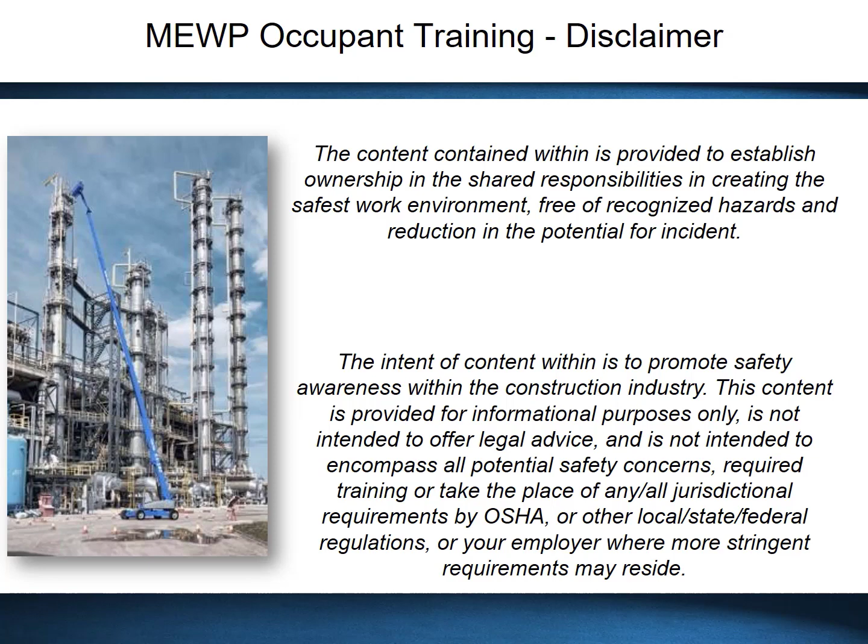Mobile elevating work platforms are governed by the A92 standard, and they are changing. There are a lot of aspects of the standard that are changing, so I've condensed this presentation down to the most important things that you need to know.

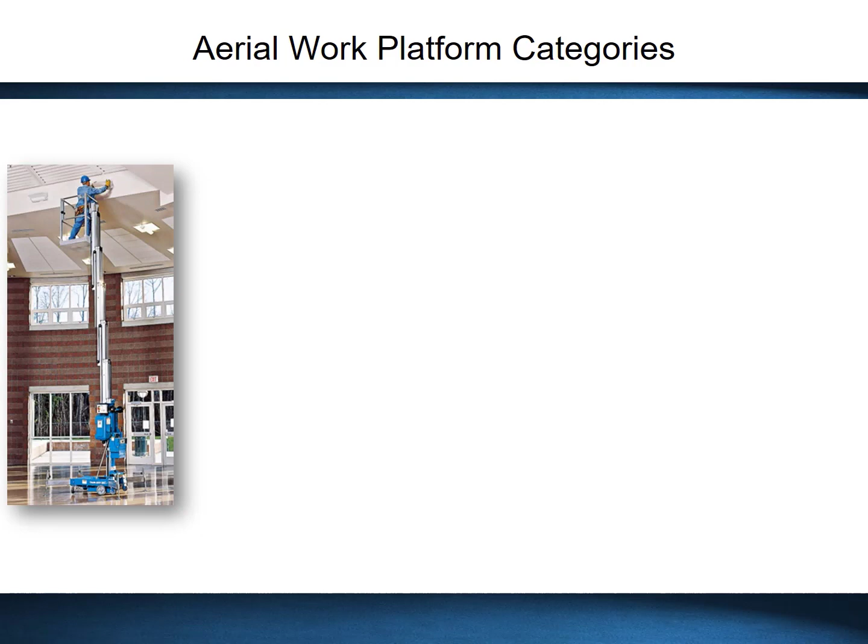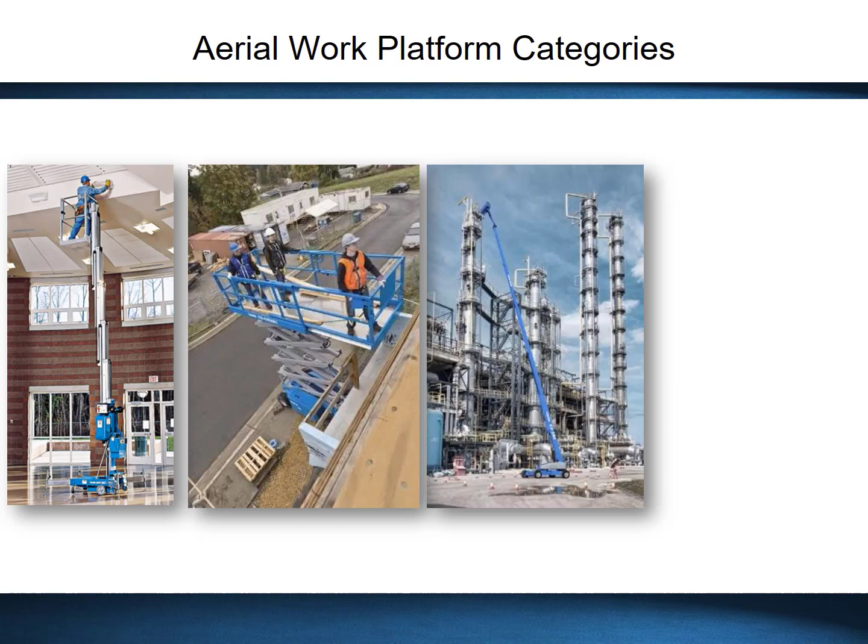Aerial work platforms previously fell into four categories: manually propelled vertical elevating work platforms, self-propelled vertical elevating work platforms such as scissor lifts and single personnel lifts, self-propelled boom-supported elevating work platforms such as articulated and telescopic booms, and vehicle-mounted elevating work platforms such as trailer-mounted booms.

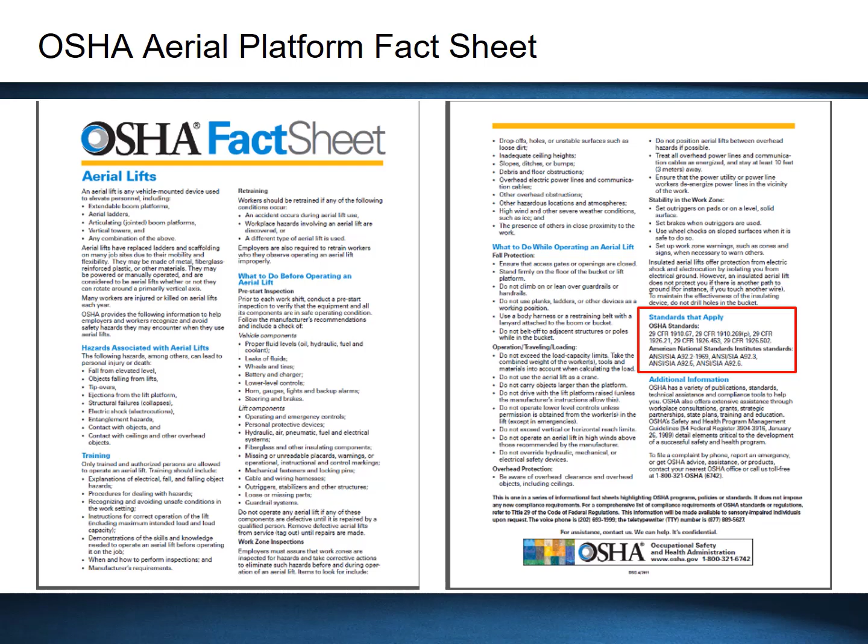If you take a look at the aerial platform fact sheet provided on the OSHA website, you can see that it actually references the standards that apply. In addition to A92.2, they also list A92.3, A92.5, and A92.6. So when the new ANSI A92.22 and A92.24 standards are released, it follows that OSHA will enforce those as well.

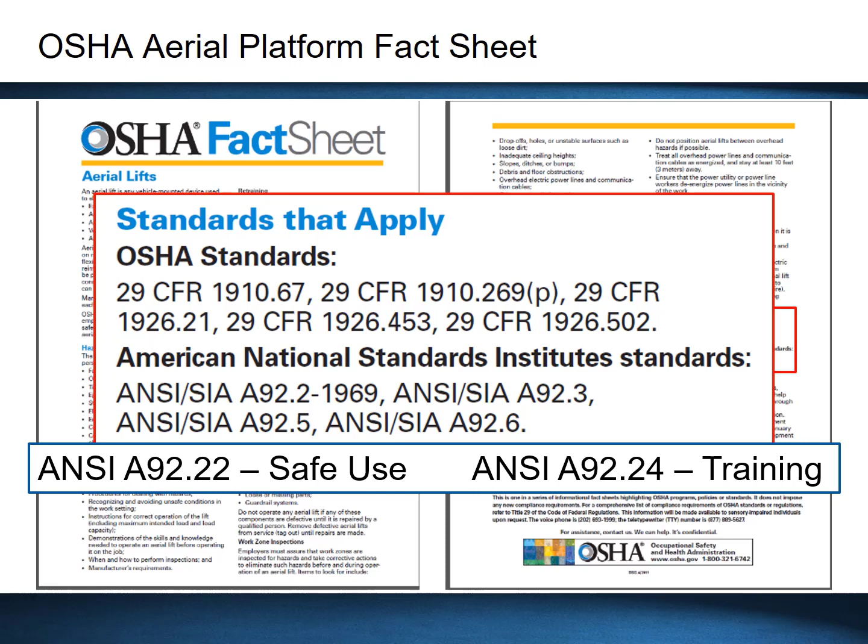Along with the term Mobile Elevating Work Platform comes a new acronym. Instead of AWP, we will be calling aerial equipment MEWPs.

Also, instead of the previous four categories of AWP that I mentioned at the beginning of this presentation, we will be using a new set of classifications. MEWP classifications are made up of a combination of two distinguishing descriptions: a MEWP group and associated MEWP type.

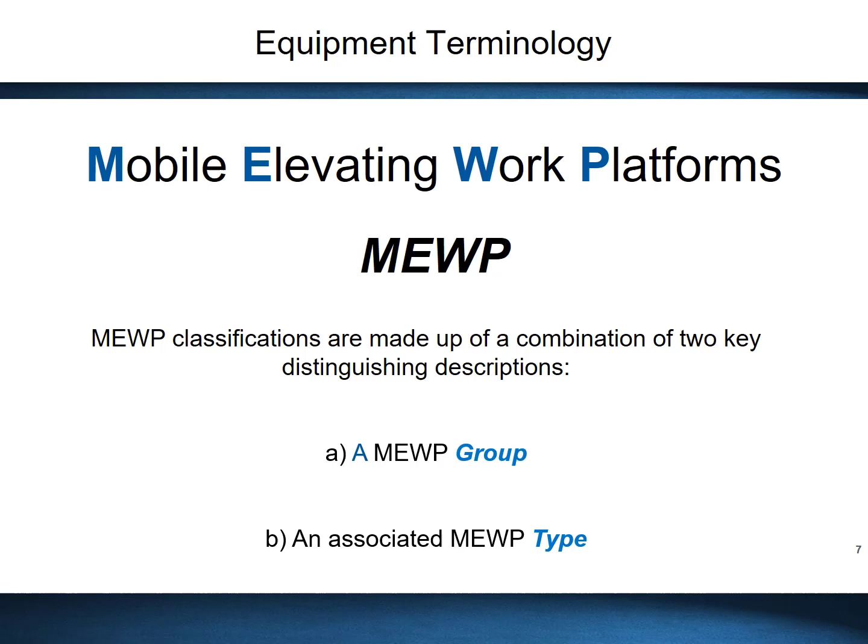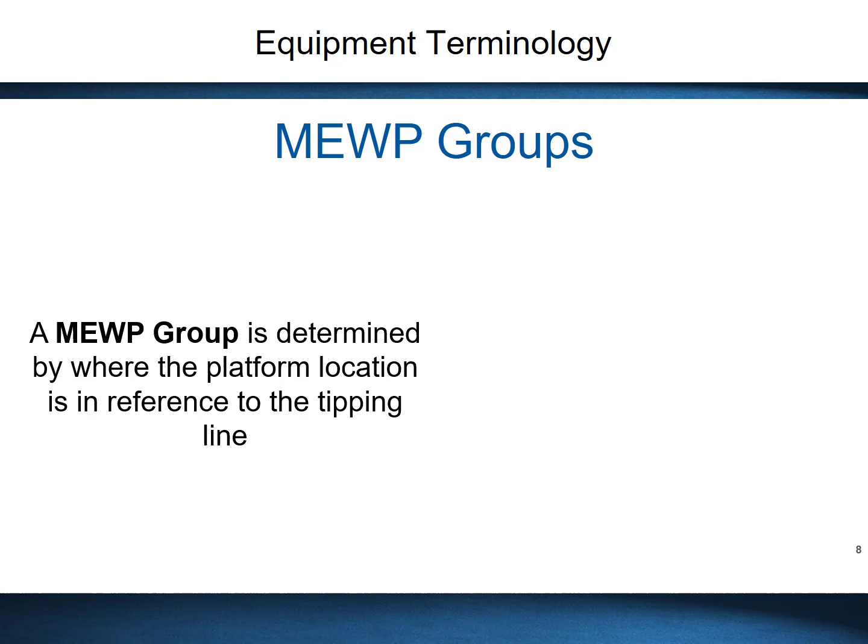A MEWP group is determined by where the platform location is in reference to the tipping line, which is either at the wheels or at the outriggers. A Group A machine has a design that does not allow the main platform to extend beyond the tipping line. In other words, the platform does not go outside of the drive chassis envelope. A perfect example of a Group A would be a scissor lift.

Conversely, a Group B machine has a design that allows the platform to extend beyond the tipping line. A great example of a Group B machine would be an articulating or telescoping boom.

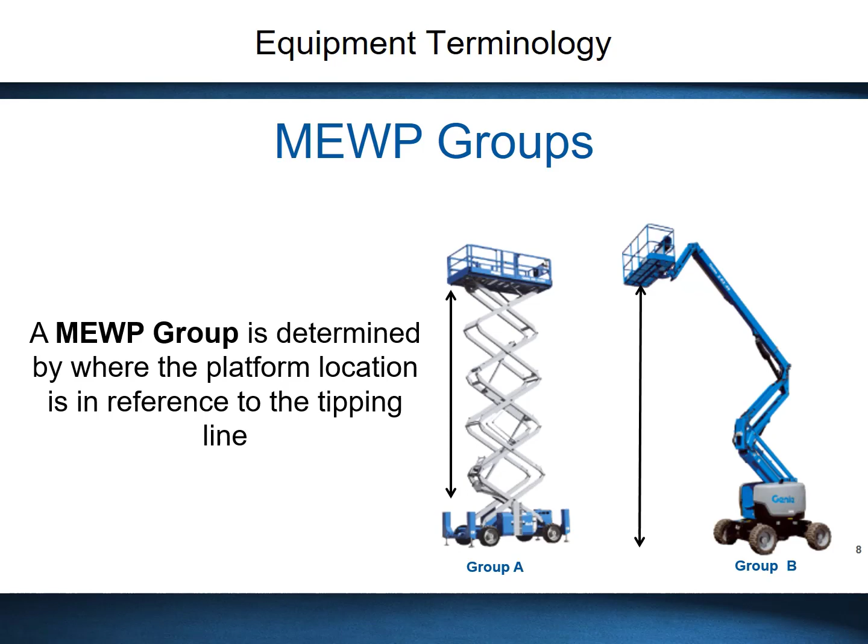In addition to a MEWP group, we have a MEWP type. A MEWP type is in reference to traveling. There are three MEWP types.

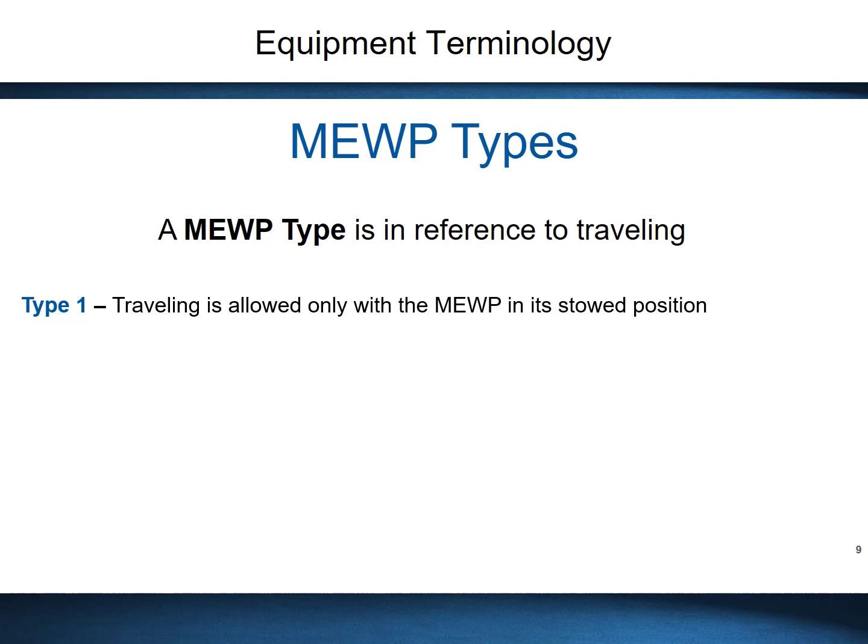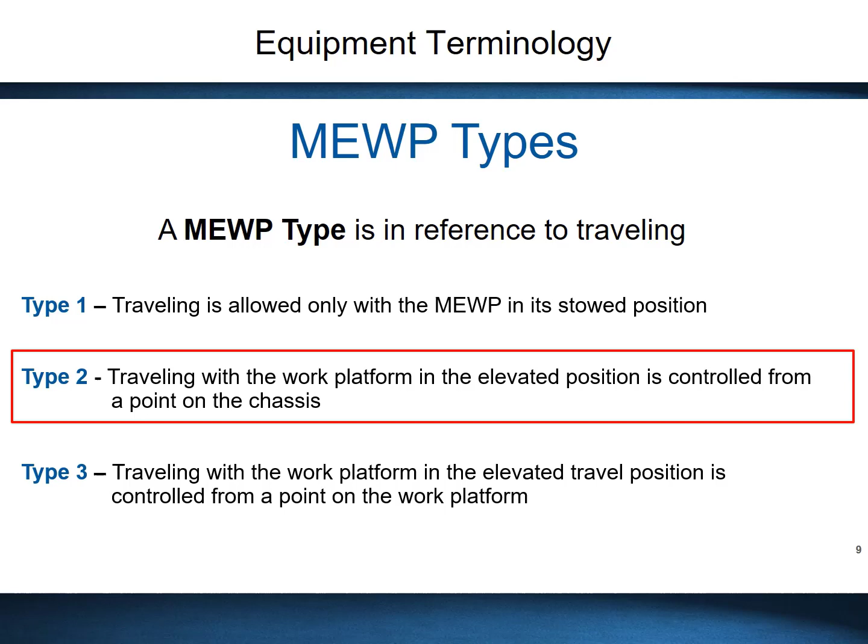Type 1: traveling with a Type 1 MEWP is allowed only when the machine is in a stowed position. I will give you some examples of these in a moment. Type 2: traveling with a Type 2 MEWP with the work platform in the elevated position is controlled from a point on the chassis. Type 3: traveling with a Type 3 MEWP with the work platform in the elevated position is controlled from a point on the work platform.

Type 2 MEWPs are not as common as the others. For the purpose of this training program, we will focus on Type 1 and Type 3 machines only.

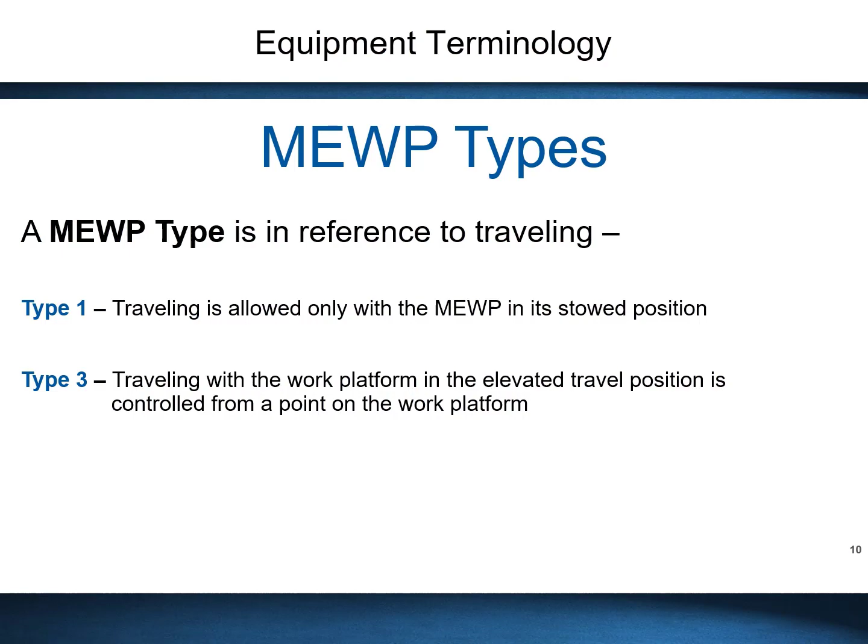Genie has supplied several different guidelines for the different types of MEWPs available to help you in the proper selection of the equipment for your project.

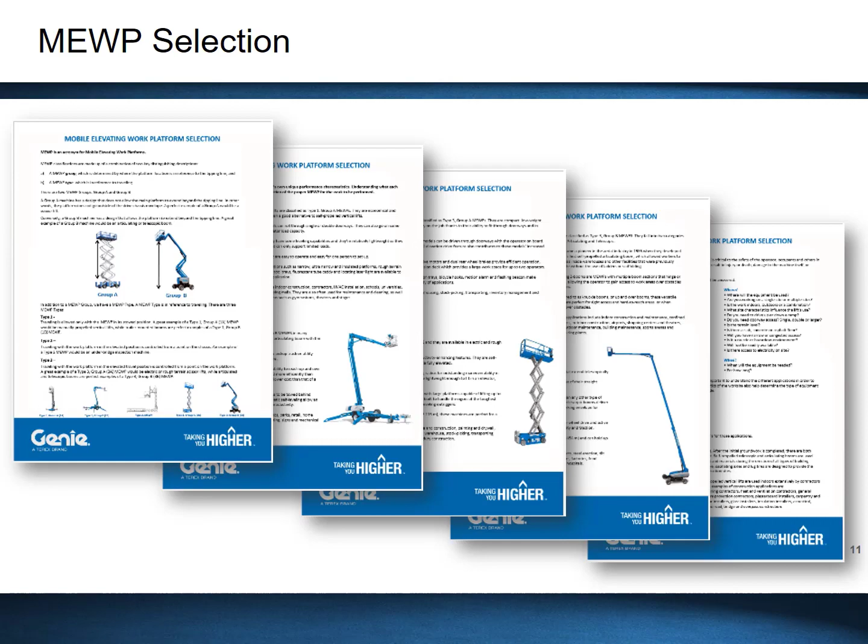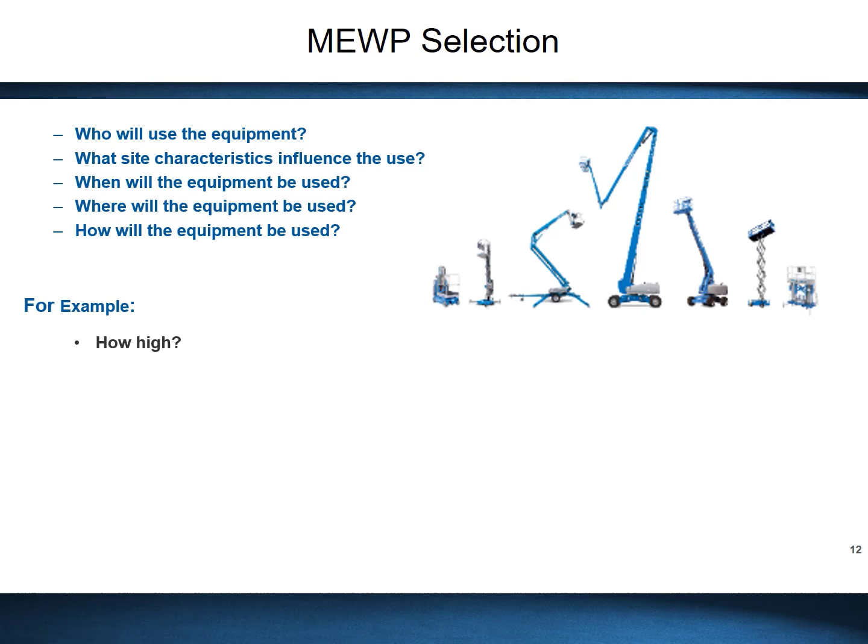Proper selection of MEWPs must also be covered. This will involve asking a series of questions regarding the application: Who will use the equipment? What site characteristics influence the use? When will the equipment be used? Where will the equipment be used? How will the equipment be used? For example, how high will you work? Outreach or not? How many people in the platform? How much do the materials, tools, and equipment weigh?

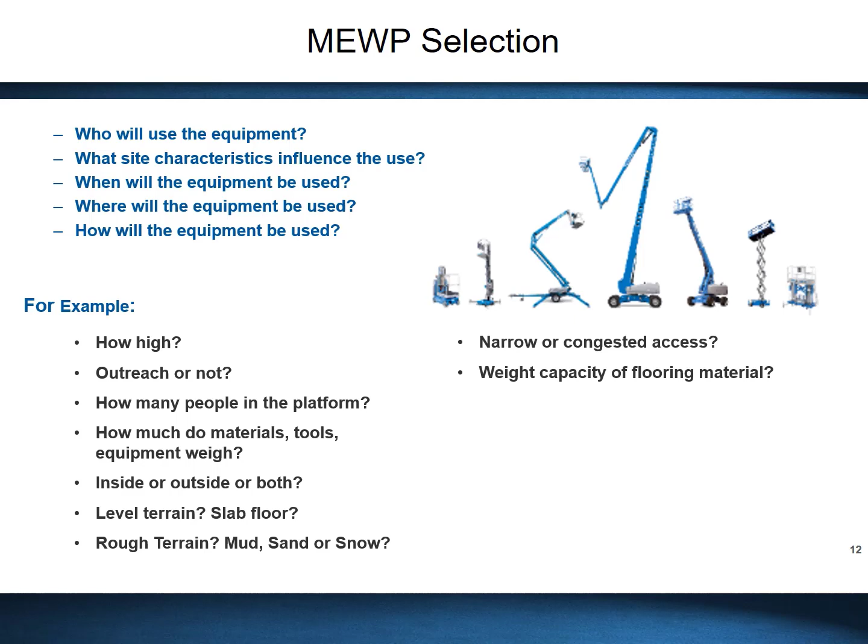Inside or outside, or both. Level terrain, slab floor. Rough terrain, mud, sand or snow. Narrow or congested access. Weight capacity of the flooring material. Need to drive up a ramp. Unusual working conditions. Doorway access, single or double. Vehicles available for transporting. Power source.

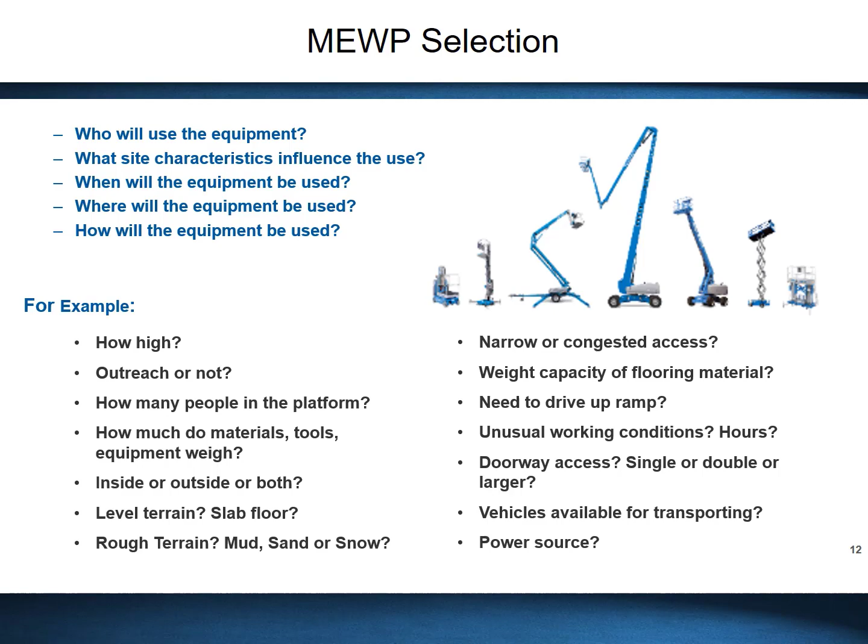There are 4 categories we'll discuss going forward: Type 1A, 1B, 3A, 3B.

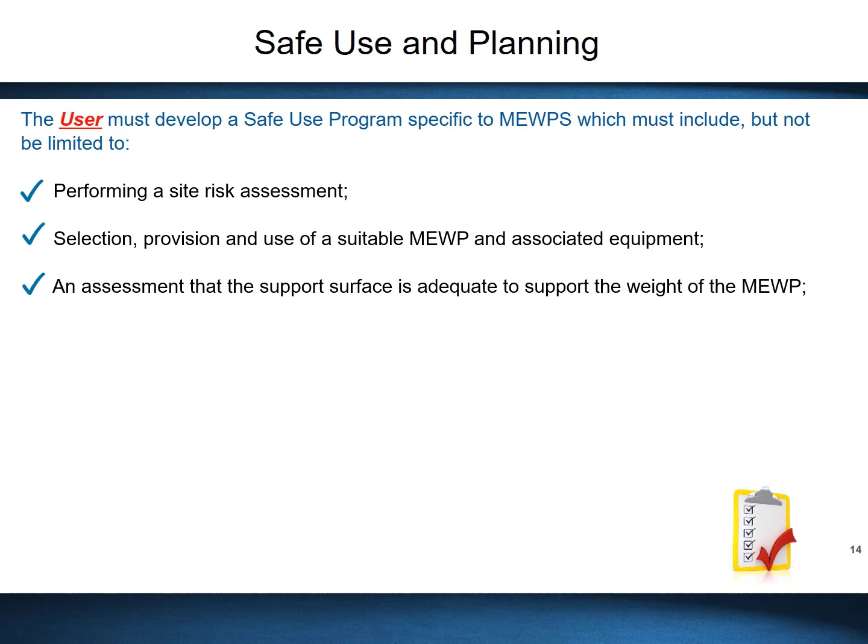The user must develop a safe use program specific to MEWPs, which must include, but not limited to: performing a site risk assessment; selection, provision, and use of suitable MEWP and associated equipment; an assessment that the support surface is adequate to support the weight of the MEWP; and MEWP maintenance, including inspections and repairs.

Inform the operator of local site requirements and warn and provide the means to protect against identified hazards. Have a trained and qualified supervisor monitor the performance of the operator's work. Prevent unauthorized use of the MEWP, and ensure the safety of persons not involved in the operation of the MEWP.

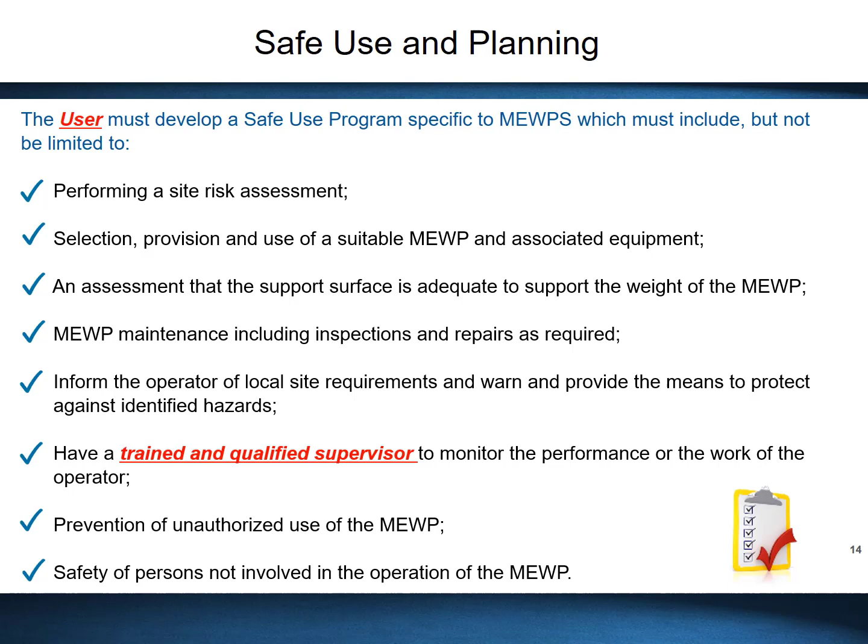Risk assessment: the risks associated with the task specific to MEWP operations shall be identified. These might be associated with the location where the work is to be carried out, the nature of the MEWP, or the personnel, materials, and equipment to be carried. Be sure you identify control measures, identify safe work procedures, rescue from height, and communicate the results.

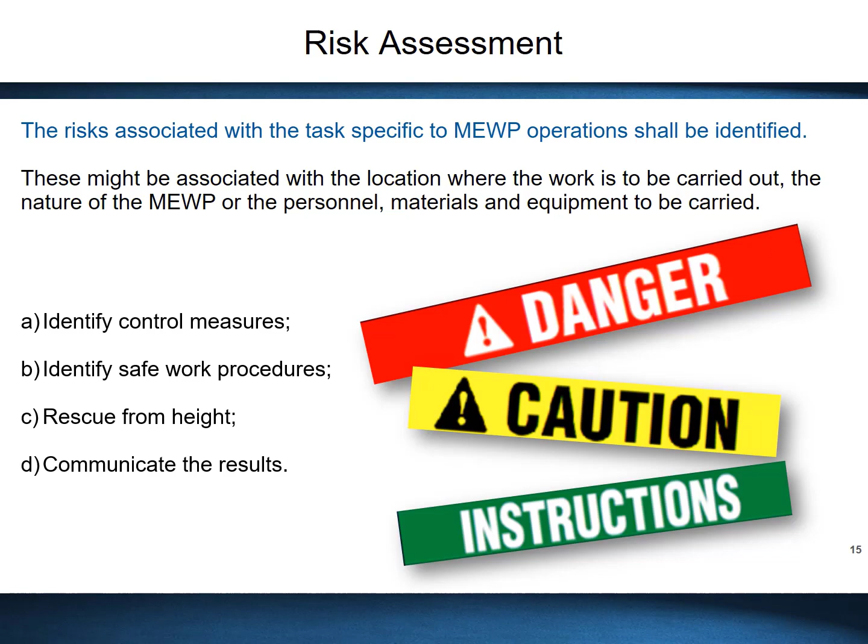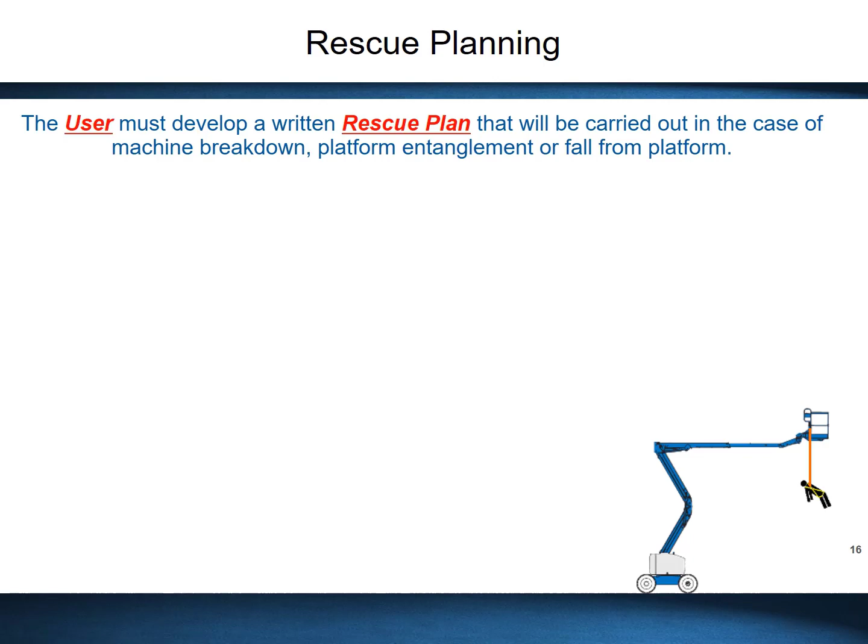The user must develop a written rescue plan that will be carried out in case the machine breaks down, platform entanglement, or fall from the platform. This plan shall be in writing. All occupants must receive training that explains procedures to follow if they fall and await rescue, or witness another worker's fall. This plan must limit the time that a properly restrained worker hangs suspended in the air.

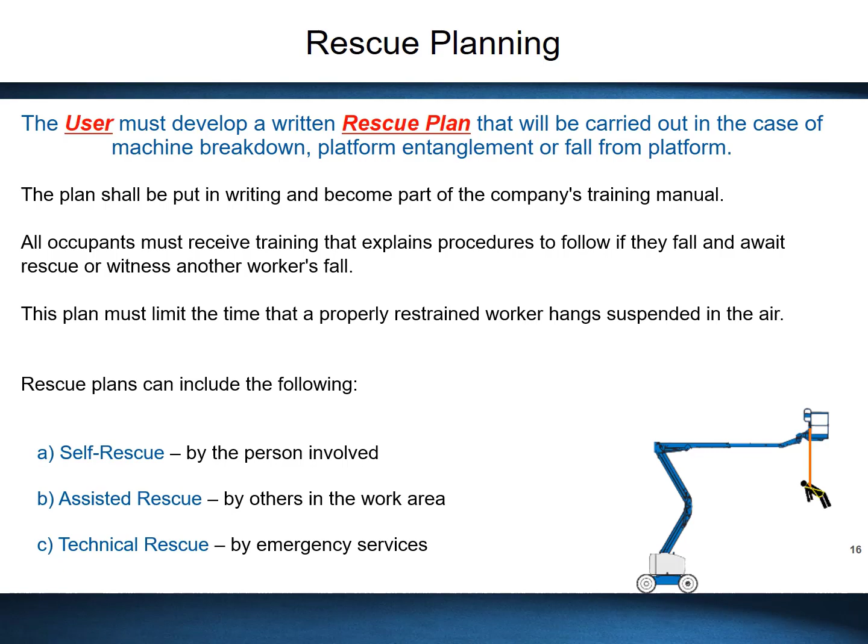Rescue plans can include the following: self-rescue, assisted rescue, technical rescue.

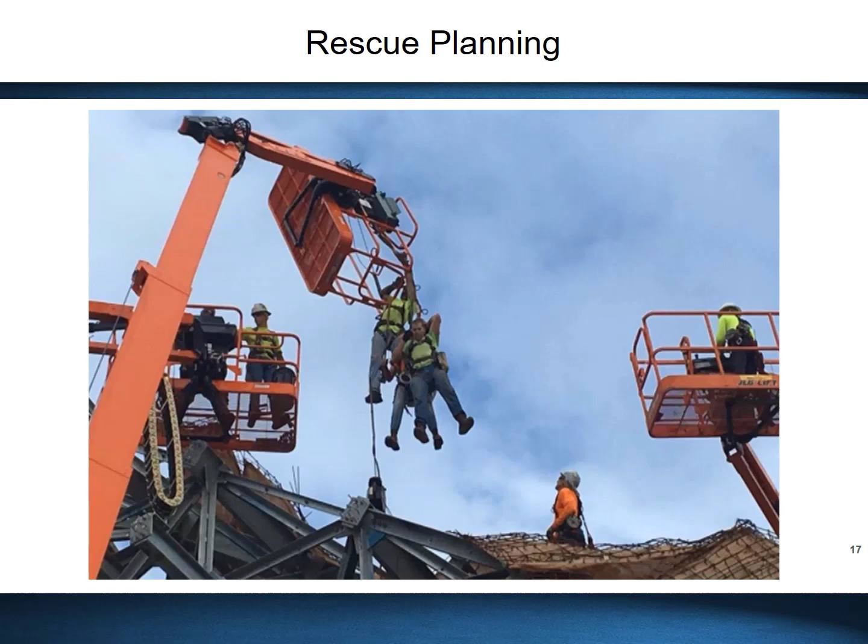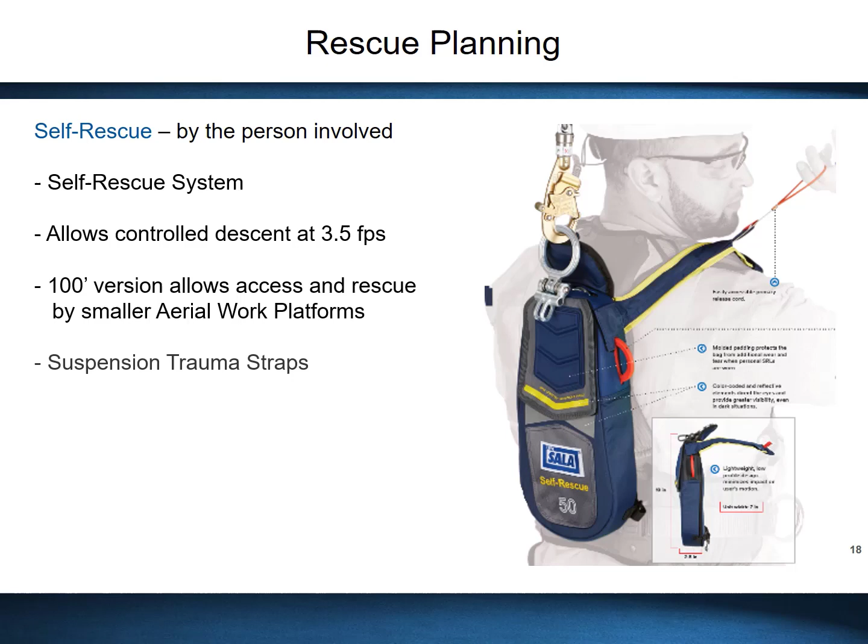Self-rescue systems come in a variety of styles that can assist the operator in lowering themselves to the ground, such as the systems shown here. They are relatively affordable packs that mount onto your existing fall protection harness. In the event of a fall, the operator simply pulls the ripcord and the system will slowly lower them to the ground.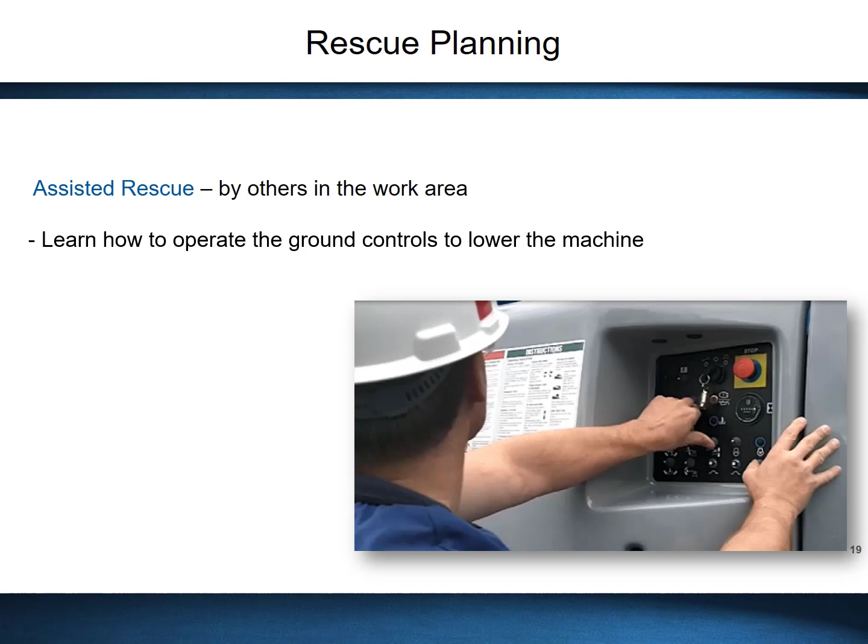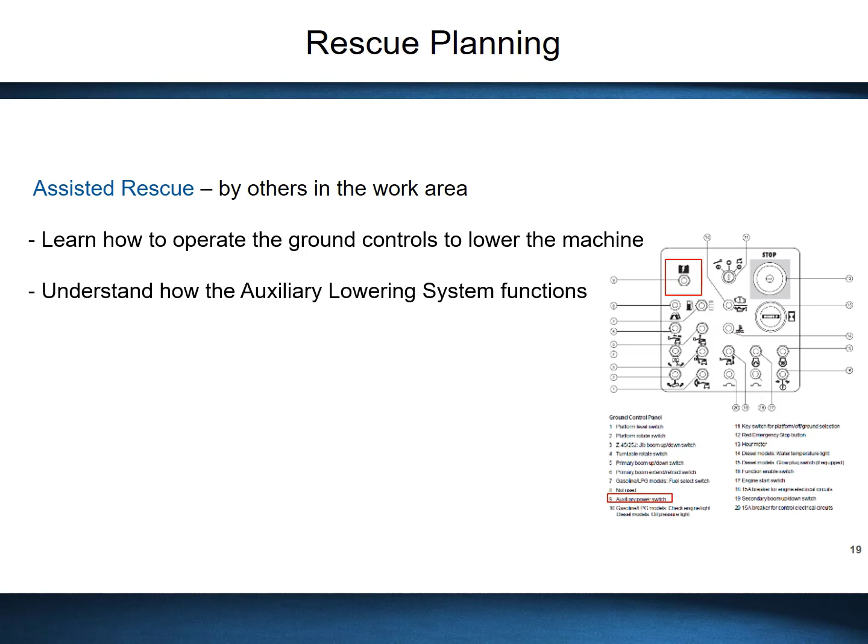Assisted rescue by others in the work area will most often be done by lowering them from the ground controls, so it will be crucial to ensure that all workers in the area have been familiarized to operate them in an emergency situation. They should also be familiarized on how the auxiliary controls function should the main system fail for some reason. Of course, you should always try to have a backup work platform in the area, should you need to do a platform-to-platform rescue.

Genie has provided guidance and resources on the creation of a rescue plan so you will not have to start from scratch.

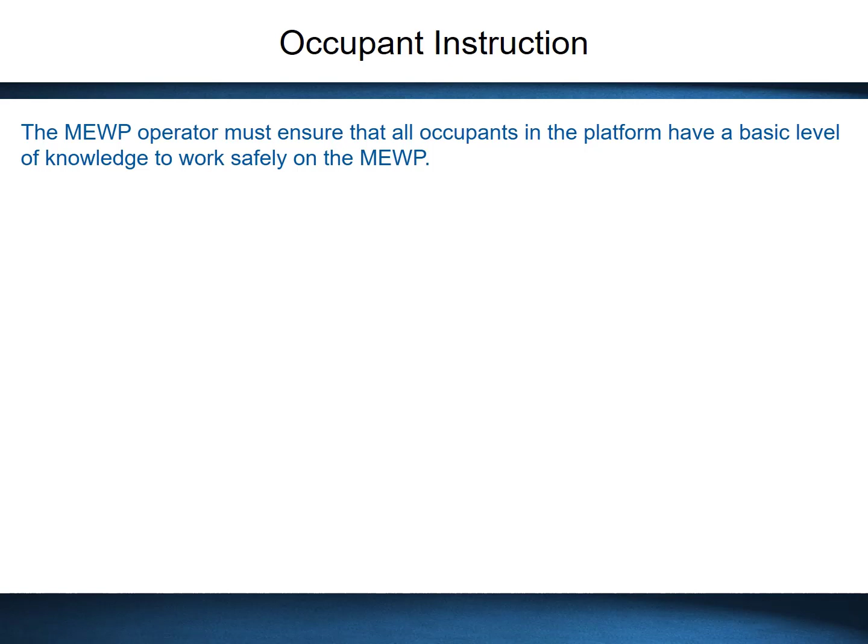Another major addition to the standard is occupant training. The MEWP operator must ensure that all occupants in the platform have a basic level of knowledge to work safely on the MEWP. They must cover the requirements to use fall protection and the location of fall protection anchors.

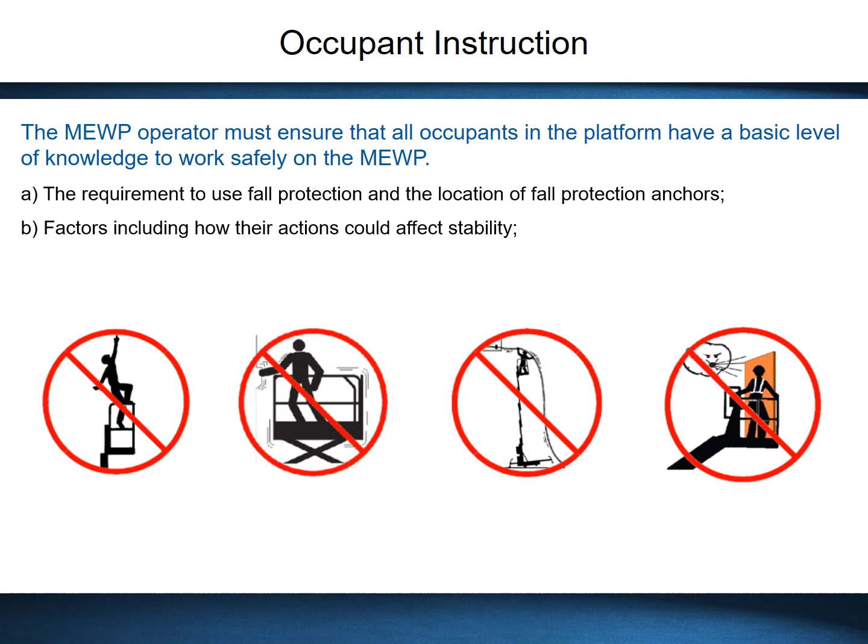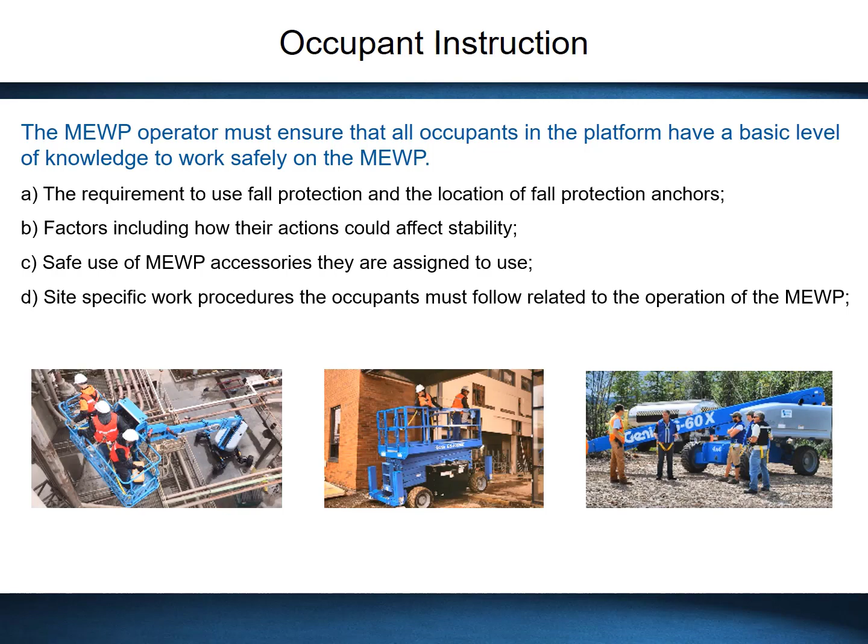Factors include how their actions could affect stability, safe use of any MEWP accessories they are assigned to use, any site-specific work procedures the occupants must follow related to the operation of the MEWP, hazards related to the task at hand and their avoidance, manufacturer's warnings and instructions, and at least one of the occupants must be provided with the knowledge to operate the controls in an emergency where the operator cannot.

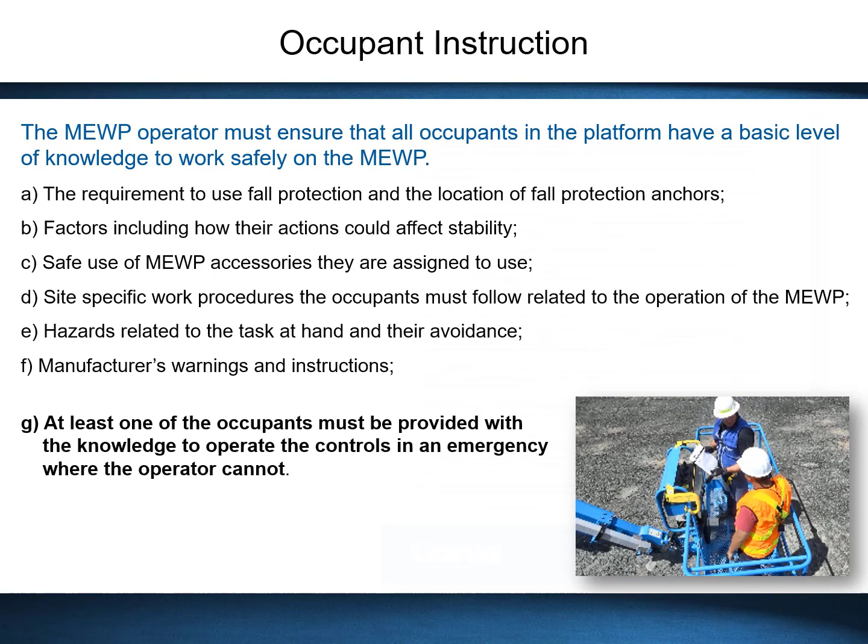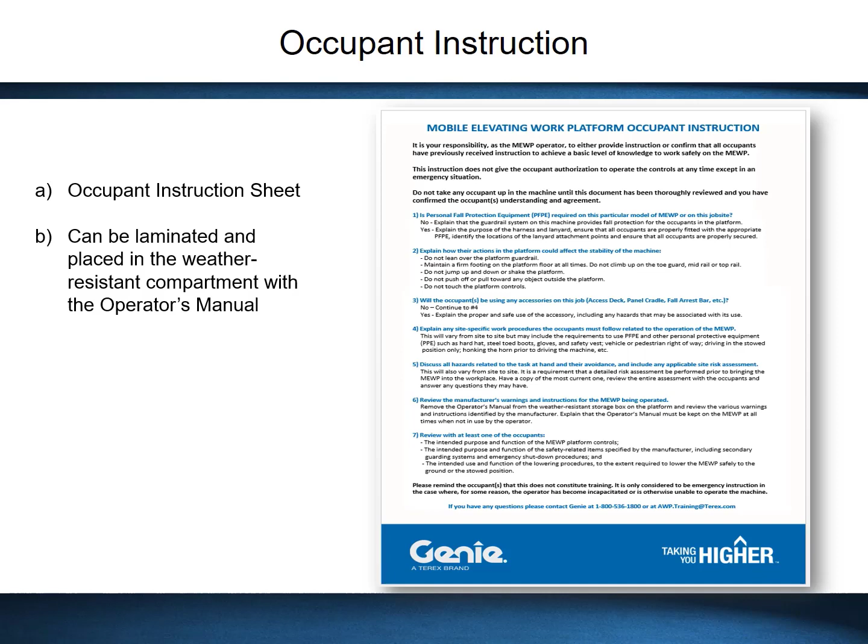Genie has provided us with an occupant instruction sheet. The sheet can be laminated and placed in a weather-resistant compartment with the operator's manual. It provides the operator with easy access to the required information and ensures compliance with the standard.

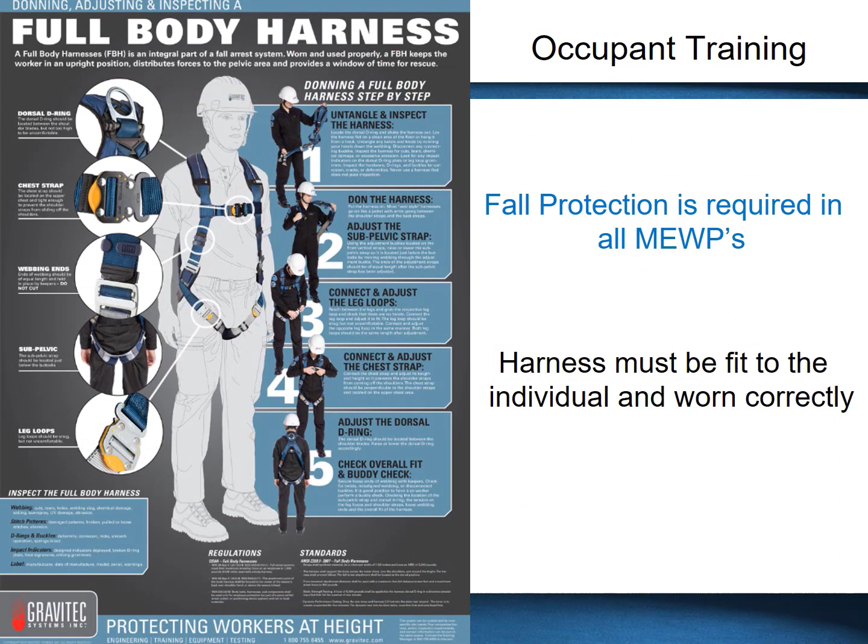Fall protection is required in all MEWPs. Harnesses must be fit to the individual and worn correctly. The MEWP operator must ensure that all occupants are wearing their fall protection gear appropriately and attached to the correct anchor point.

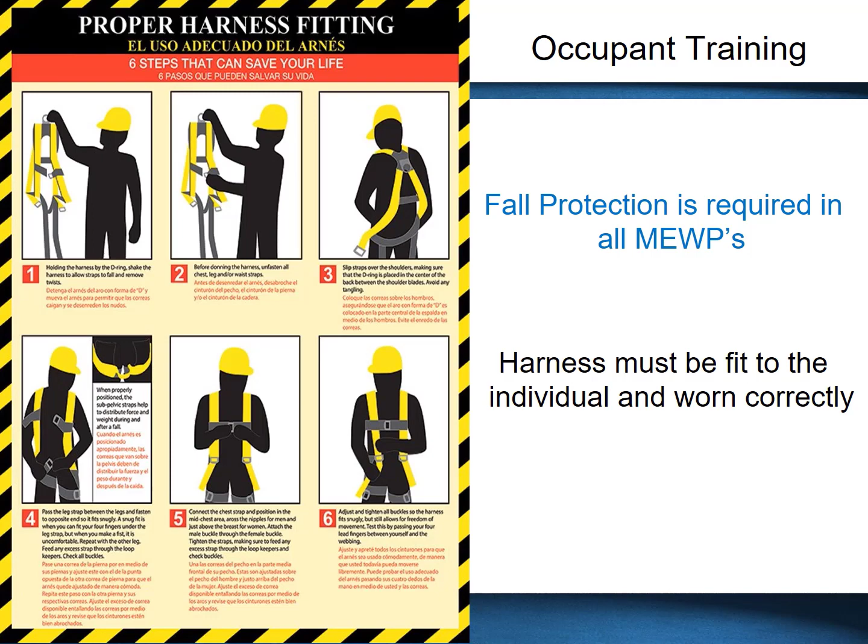Fall restraint devices must maintain connection to the manufacturer's designated anchor point at all times. Under no circumstances will fall restraint devices be attached to a MEWP handrail, building structure, or other points. Always follow manufacturer's recommendations for fall restraint or Haskell's Code of Safe Practices, whichever is most stringent.

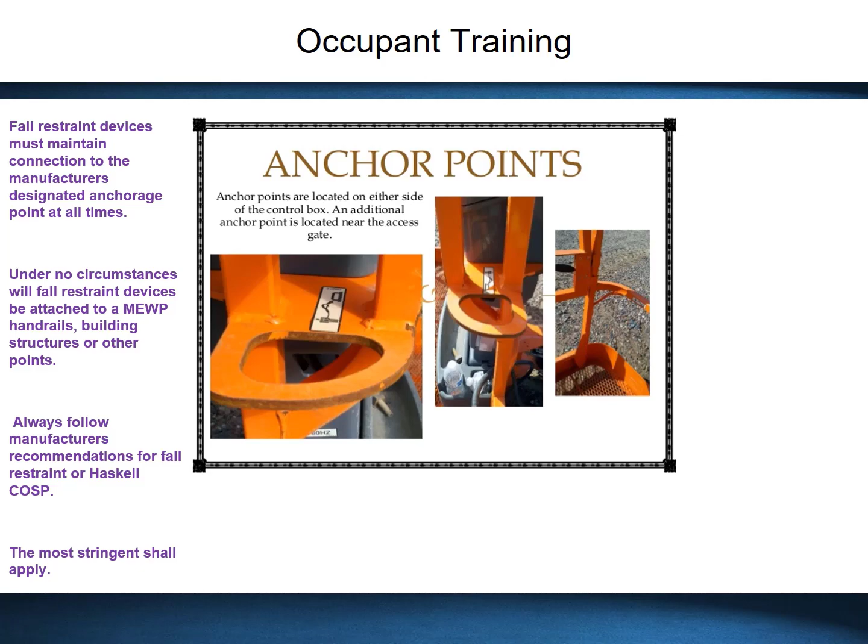Utilize a maximum of a 6-foot SRL. Fall restraint shall be connected in a scissor lift unless occupants are moving between anchor points. In this case, the lift controls shall be neutralized when operators are moving between connections, and/or fully retracted and neutralized for any movement.

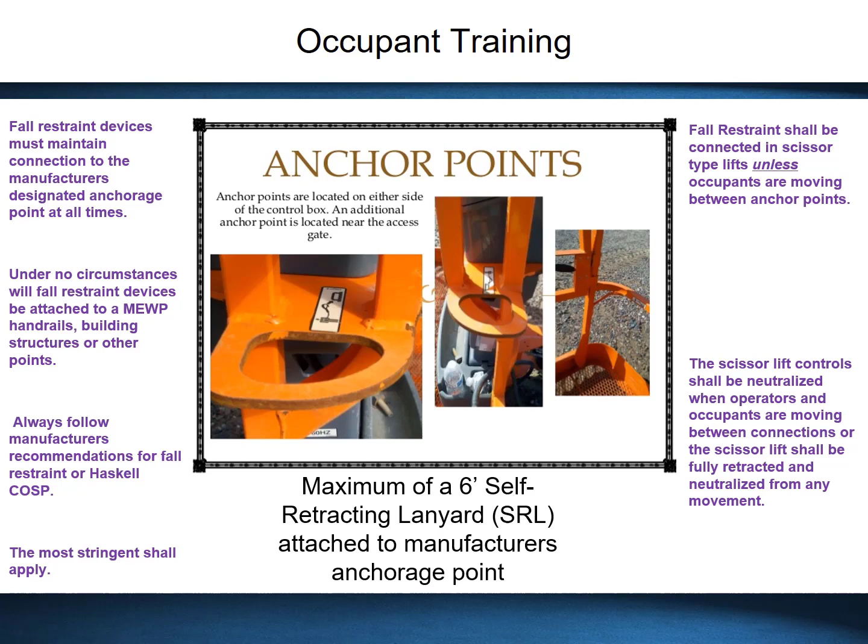MEWP stability: manufacturer specifications and limitations shall be observed. This includes load capacity verifications, occupant limitations, subgrade limitations, and similar. Weight capacities of MEWP units shall be visible to the operator at all times.

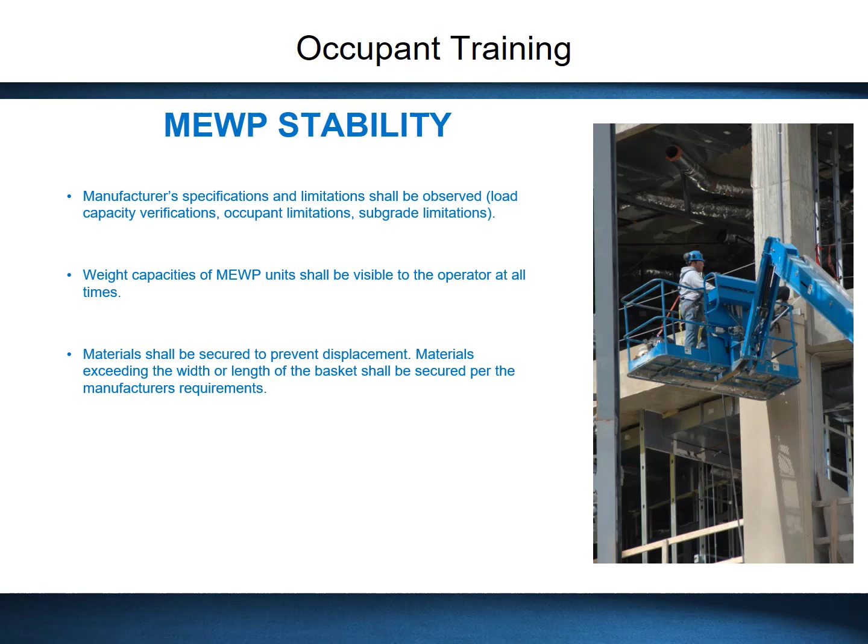Materials shall be secured to prevent displacement. Materials exceeding the width or length of the basket shall be secured per the manufacturer's requirements. Follow the manufacturer's recommendations for handling materials and supplies.

Do not lean over the platform guardrail. Maintain a firm footing on the platform floor at all times. Do not climb up on the toe guard, mid-rail, or top rail. Do not jump up and down or shake the platform.

Do not push off or pull toward any object outside the platform. Do not touch the platform controls. Maintain communication at all times with the operator and avoid sudden movements.

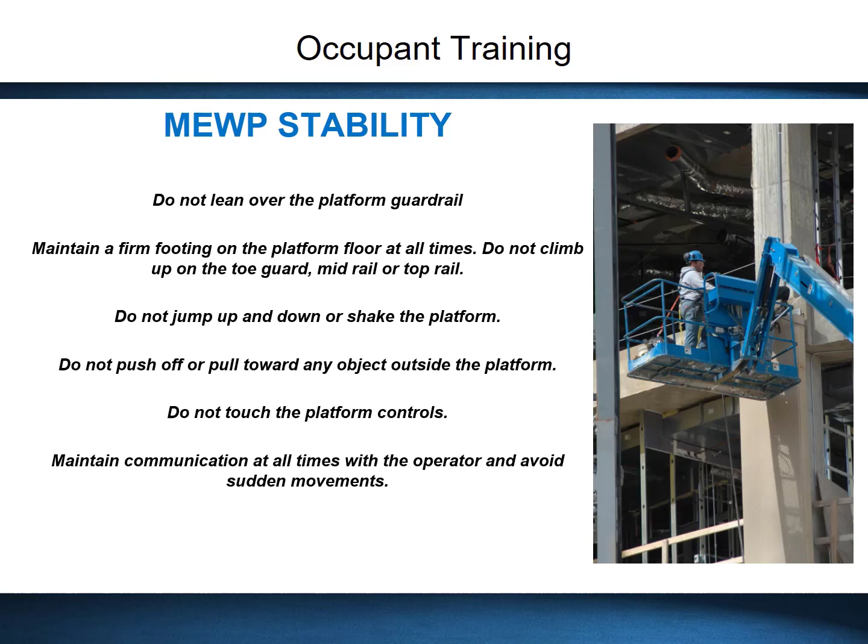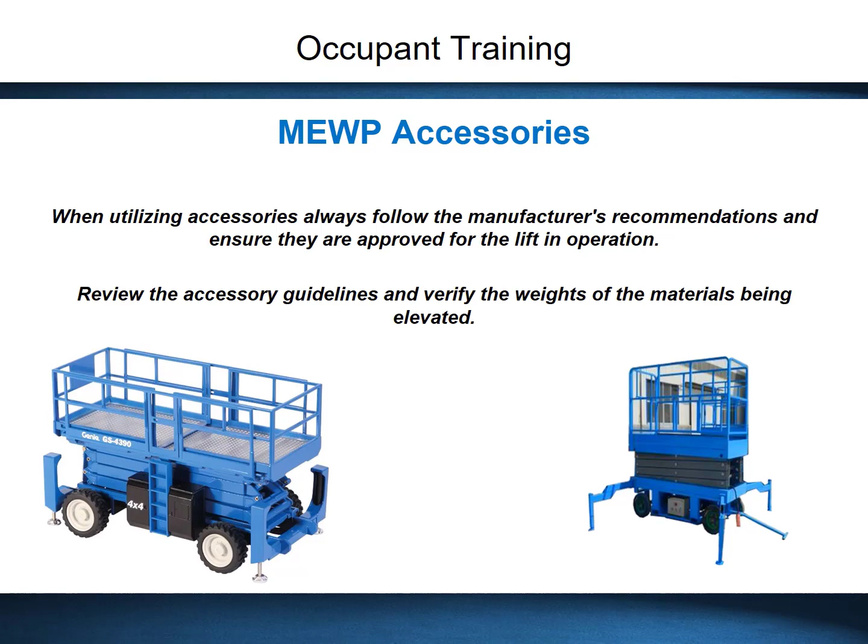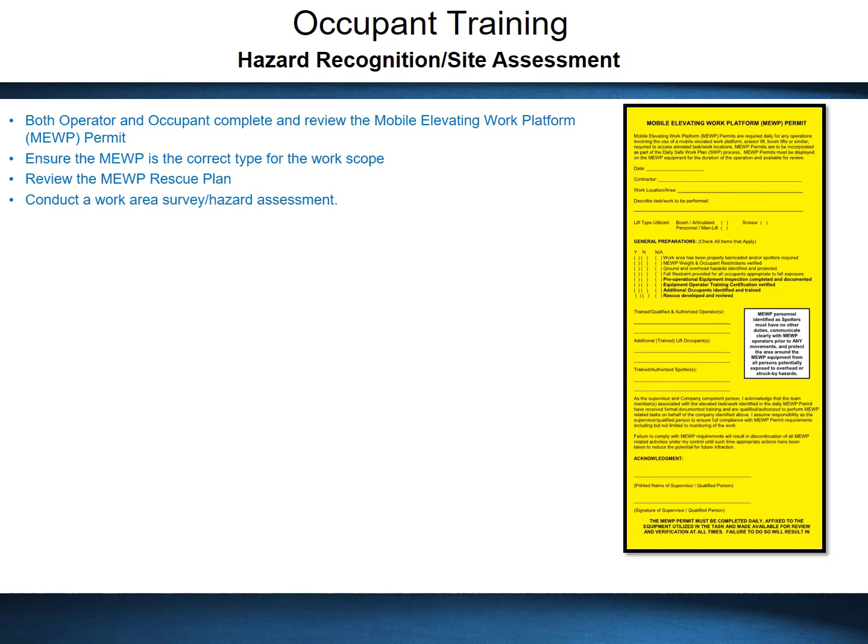Hazard recognition and site assessment. Complete and review the mobile elevating work platform (MEWP) permit. Ensure the MEWP is the correct type for the scope of work. Review the MEWP rescue plan. Conduct a work area survey and hazard assessment.

Are there drop-offs, holes, floor drains, etc.? Slopes, bumps, floor obstructions, and electrical cables? Confined or enclosed areas, debris, overhead obstructions, electrical conductors, hazardous atmospheres and/or hazardous locations, wind loads and inclement weather conditions?

Traffic hazards and other mobile equipment, surfaces that are inadequate to sustain the ground-bearing pressures imposed by the MEWP, underground installations and drains, light gauge metal concrete decks, mezzanines, floor grating.

Maintain the safety of workers both in and around the MEWP operation. Maintain a controlled area below and around the MEWP to prevent persons and objects from being struck.

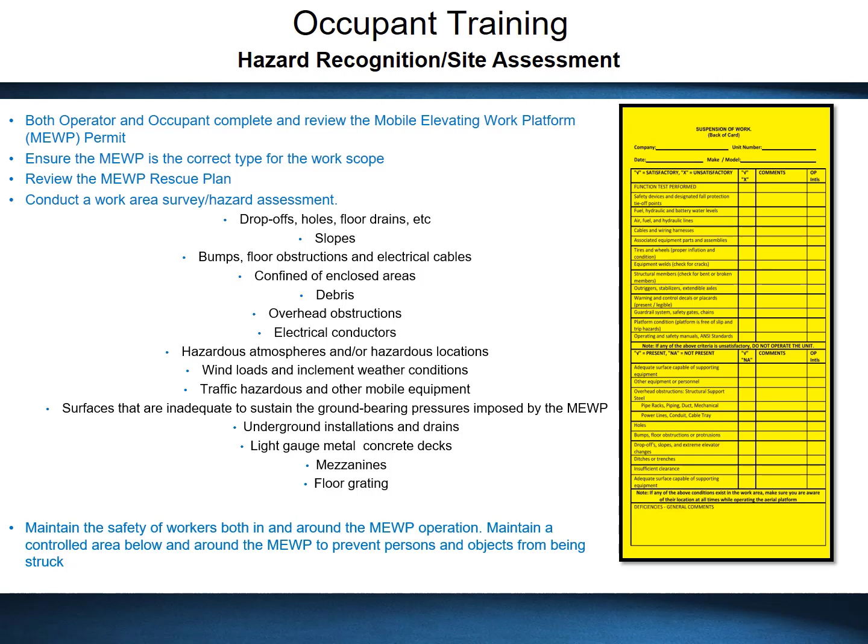MEWP operation and operator's manuals. Review the manufacturer's safe operation and warnings with the MEWP operator. Understand the safe operation and scope of work, including the equipment capabilities and limitations. Review the controls and emergency operation of the lift with the operator.

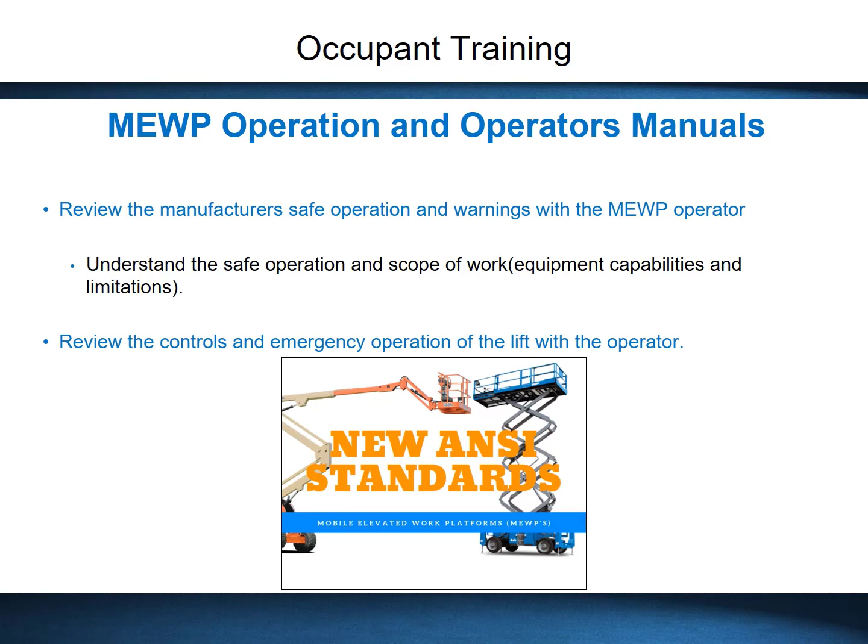MEWP review: review the MEWP operator certification card for the type of lift. Ensure the MEWP is the correct machine for the task. Ensure the MEWP has a current annual and pre-operation inspection.

Complete a worksite assessment and rescue plan. Complete and post the MEWP permit. Review the manufacturer's safe operation and warnings with the MEWP operator. Review the controls and emergency operation of the lift with the operator.

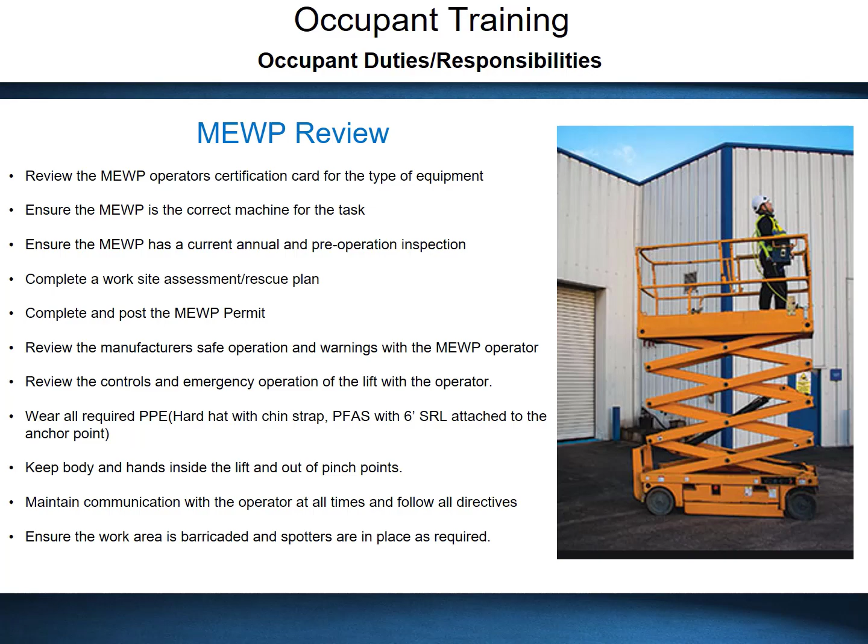Wear all required PPE: hard hat with chin strap, PFAS with 6-foot SRL attached to the anchor point. Keep body and hands inside the lift and out of pinch points. Maintain communication with the operator at all times and follow all directives. Ensure the work area is barricaded and spotters are in place as required.